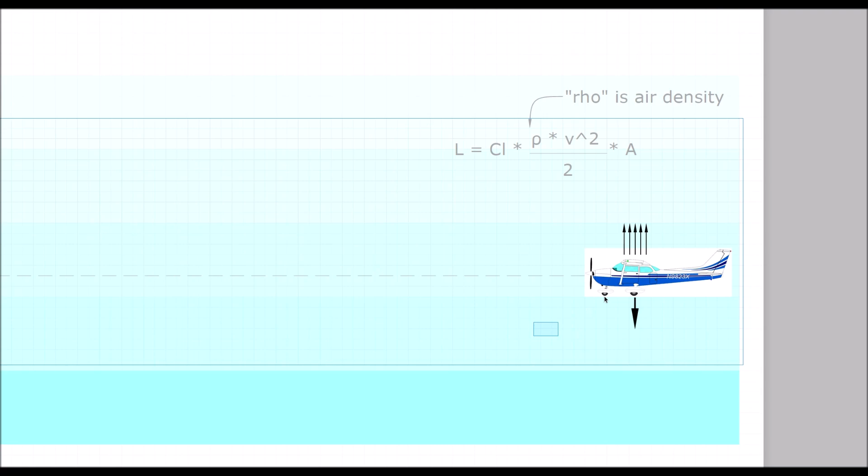So this airplane is flying at a certain speed, and with our velocity, our shape factor, and our area all in place, it is at a level in the atmosphere where the lift force, L, perfectly balances the weight of the airplane, so it does not fall to the ground and it does not rise any higher into the air. That's where the airplane stands right now. And so long as nothing changes, it continues to move forward at the same speed, in the same air density level, and everything is going to stay the same. It's not going to go up, it's not going to go down, it's just going to go straight ahead.

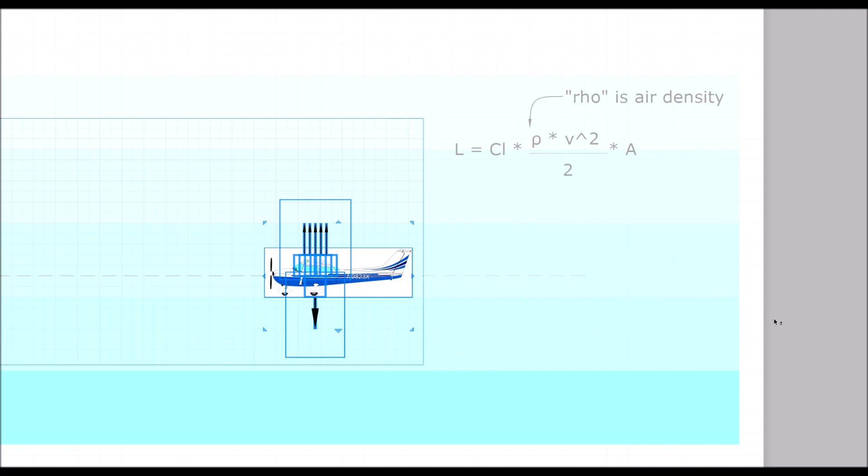Now, the atmosphere does have variations in it. Things happen. Storms, or passing from hot, dry land, like the desert of Peru, and then you find yourself over the ocean. Changes like this at the ground level, storms, can cause the density layers of the atmosphere to change, to shift, to rise up, for example.

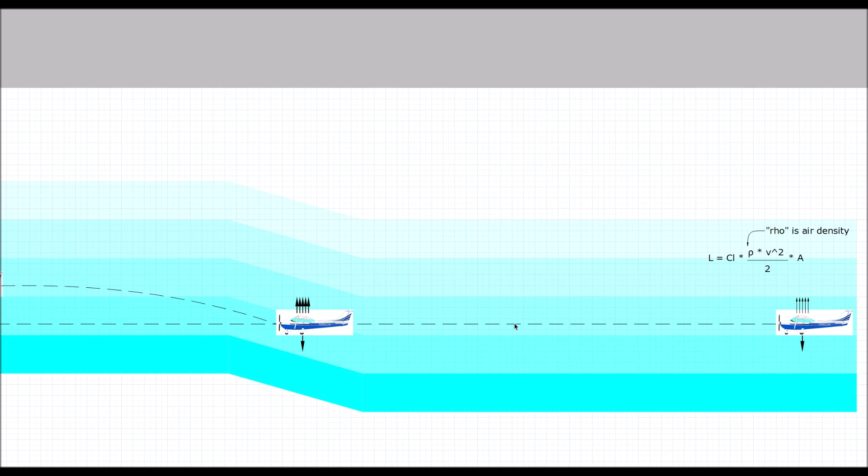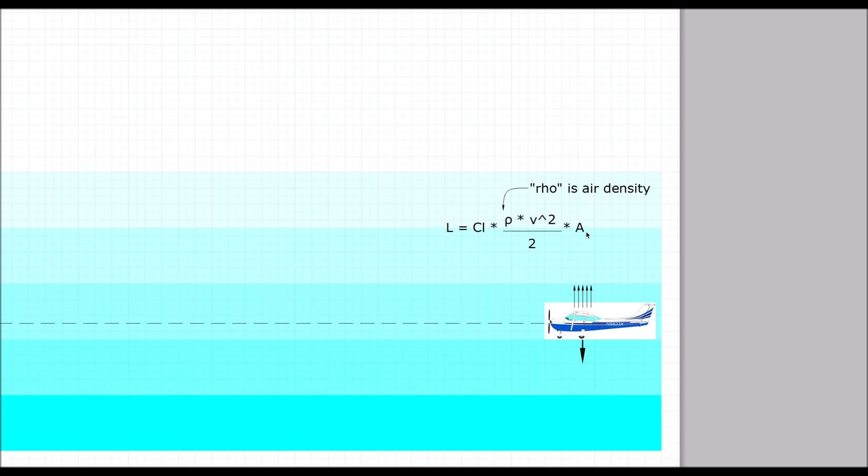So what I've shown here is our airplane. He's moving along in a straight line. Everything's fine and dandy, when all of a sudden there's a quick vertical shift in the density layers, and the airplane suddenly finds itself in a denser layer of air. As soon as that happens, the amount of lift increases because the air density increases. If we go back and look at our equation, if rho gets bigger, lift gets bigger. Shape factor hasn't changed, area hasn't changed, velocity hasn't changed, but rho has gotten bigger. So the lift gets bigger.

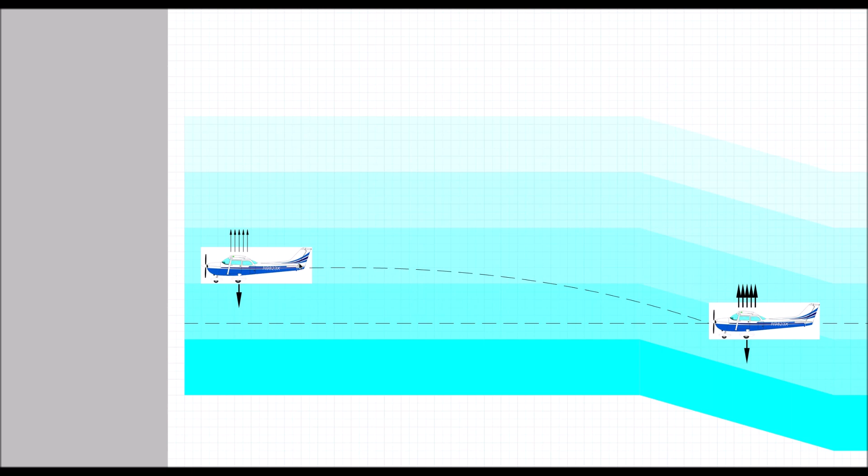Now the lift is more than the weight of the airplane. That means it's being sucked upward away from the Earth due to that denser air. So that plane, instead of going in a straight line, is going to be sucked upward until it reaches a level in the atmosphere where the air is less dense again, like when it first started. And we see that on the left here. It is now at a higher altitude, but in an air density layer that matches the one it was in at the start. Let me go back and give you the big picture here.

So here he was, starting on the right side of the screen, and you can see that he basically ends up at that same density layer at the end. So there was no adjustment that needed to be made by the pilot. Nothing in the shape of the airplane changed.

They didn't tilt the airplane upward to cause it to lift more. They didn't fiddle with the wings to cause it to lift more. It simply went higher because the air density around it changed, which caused the lift force to increase until it again reached an equilibrium point at a higher altitude.

I Can Science That had a moment in his video, in the beginning, where he touched on that, and that was a good way, if T. Brown had been paying attention, of understanding that there's nothing magical involved. So let's take a look. I'm not going to play the clip, but here's a clip. It looks like I'm at 4:50 in I Can Science That's video. He talks about what does unstable mean and what does stable mean.

And in short, unstable, you can perfectly balance a ball on the tip of a pyramid, but the slightest little bit of a breeze or the slightest little bit of a bump is going to cause that ball to fall and roll off the pyramid and be gone. Whereas this arrangement is called stable. You can lift and push that ball in various directions and it will tend to return to its original position.

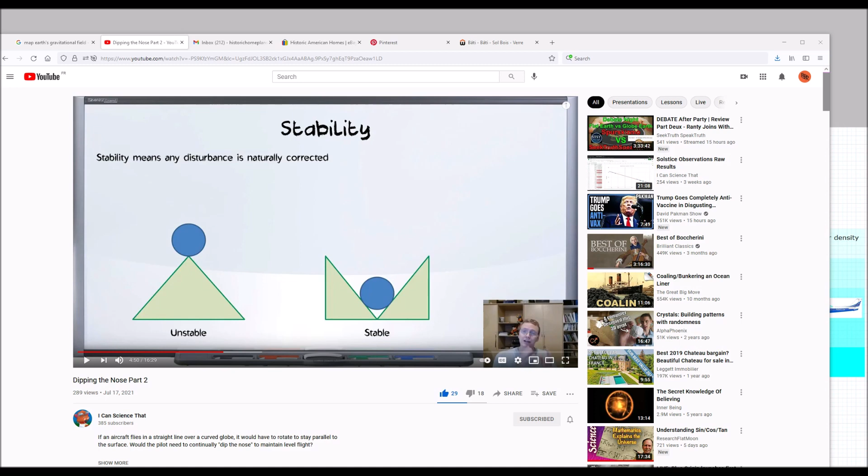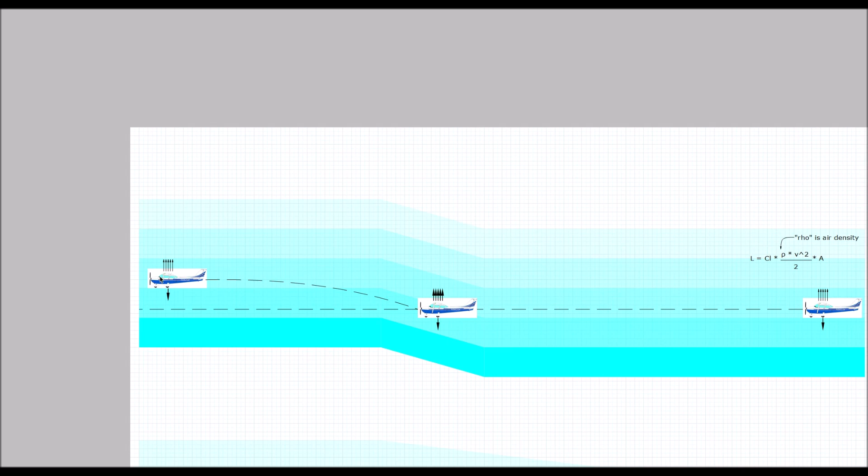This is a factor of design. Somebody creating this arrangement of objects is designing an unstable arrangement. If this is somebody creating a design of objects, they've created a stable design. So this idea of unstable and stable is an aspect of design. Returning to our airplane, the airplane is effectively designed so that it will naturally return, due to the forces acting upon it, to its original or its desired position, the position that is desired by its designer.

Okay, let's look at our next scenario now. It's similar to the first one, with one small change. Instead of there being a sudden disturbance in the atmospheric layers, we have a gradual, more gentle disturbance. Now, the plane, on a trajectory of a straight line, if it were to just continue in a straight line, would find itself in a denser layer.

But what happens is that as it approaches that zone where the atmosphere is changing, the forces acting on it, the lift increasing because of the density of the air increasing, are going to cause it to drift up more gradually to its new position. Basically, it's very similar to the top example, except that it's a gradual transition instead of a sudden transition. I think that should be pretty clear. I don't need to go further with that. So we'll move on to the next scenario.

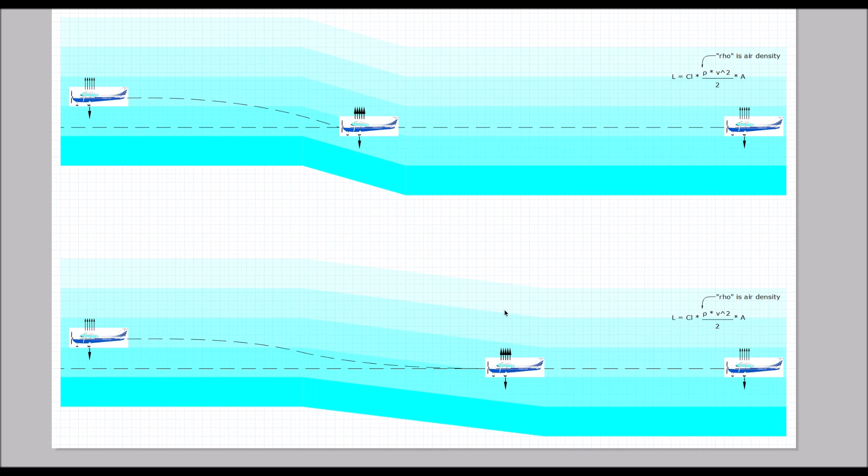So now we're looking at a situation similar to the previous scenario, a gradual transition in the atmosphere. But instead of the density levels going up, the density levels are going down. So the airplane, were it to continue in a straight line, would find itself in a layer of less dense air. Now, same as in the previous scenario, as soon as the change in the atmosphere starts to occur, the lift force is going to get weaker because the air is less dense.

And because the air is less dense, the weight of the plane is going to cause the plane to start dropping in altitude. The lift force simply can't hold the plane up because there's not enough density in the air. And that situation will continue, and that plane will continue to be moving towards an equilibrium point where the lift matches the weight, until such time as that atmospheric layer levels out again, and then it will be back at an equilibrium state.

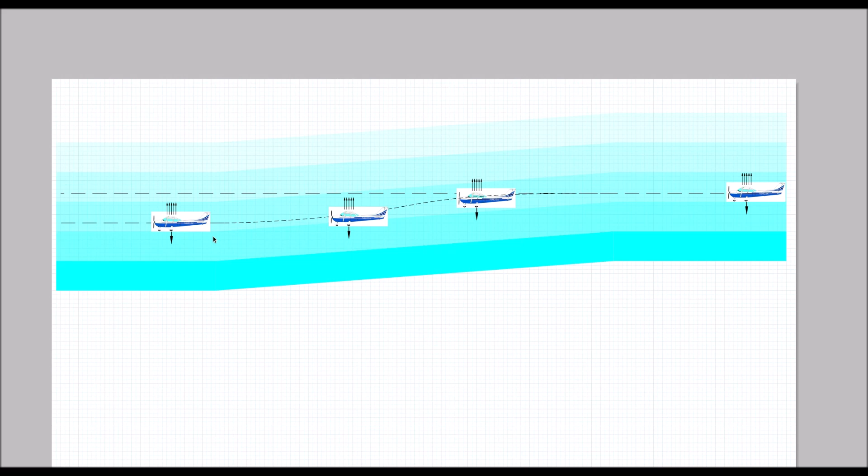So from start to finish, it's flying along here, the air gets less dense, so the plane starts to fall a little bit. And as it falls, it's moving back down into denser air again. And as it moves into denser air, the lift increases until, again, they're finally balanced with each other. So it's really exactly the same situation as we saw in the previous example, except the layers of air are the reverse.

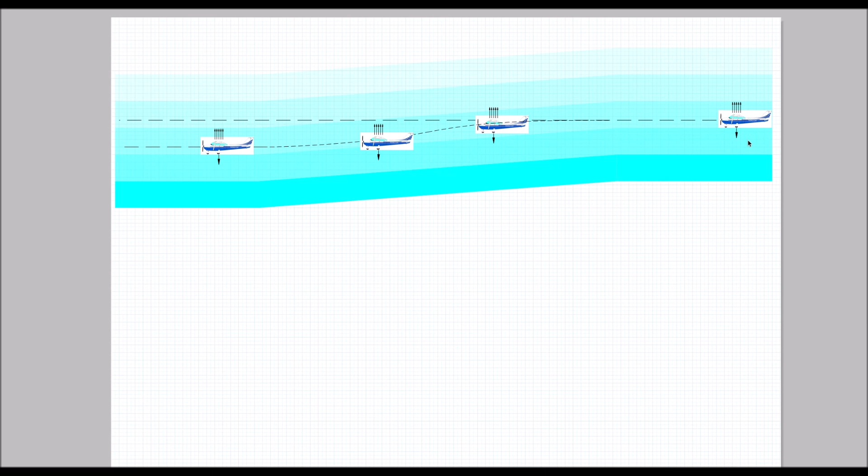Remember, all of this is happening because we are keeping everything else constant. The shape of the airplane is not changing. The speed of the airplane is not changing. The area of the wings isn't changing. None of that's changing. The only thing that's changing is the density of the air. So for this airplane not to fall out of the sky, it has to stay in that same air density layer.

And it really can't fall out of the sky so long as nothing changes, because if it's traveling at a fixed speed in a consistent density layer, the weight and the lift are balanced. It's not falling. It's not going to hit the ground until something changes. If the engine fails and it suddenly slows down, well, then it's going to start to fall. If they rev the engines up and go even faster, then it'll start to rise. But if nothing's changing, it won't fall out of the sky.

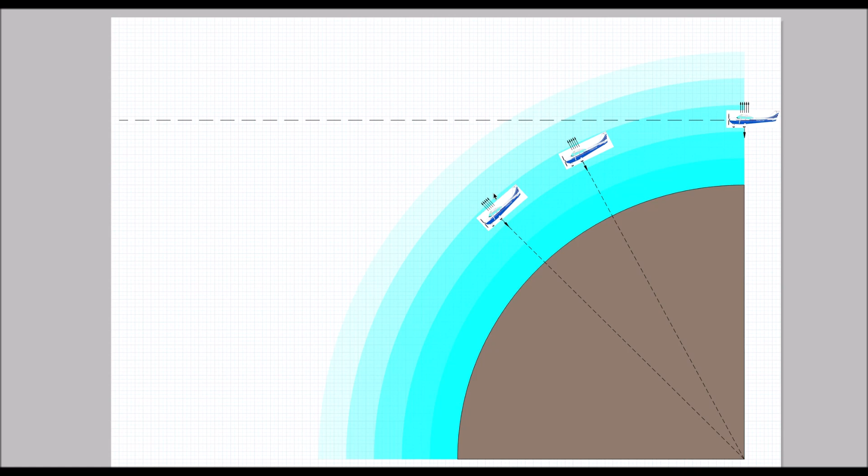Okay, it's time for some definitions. Now, what I'm going to describe here is how I intend to use these words. People can argue all they want about what they think is the correct definition. My point is simply to be understood what I mean. So, nose down, nose up, it says nose high, dipping the nose, level. These are the words we're going to look at.

Nose high, or you might want to say lifting the nose. That same line through the airplane passing through its center of gravity, the nose is above the horizontal, above the perpendicular to the plumb line. During normal level flight, cruising, most planes are designed to fly with their noses slightly up. This is typical. So nose high level flight. That's most of the time what airplanes are doing. And that's what I'm assuming in the diagrams we looked at before.

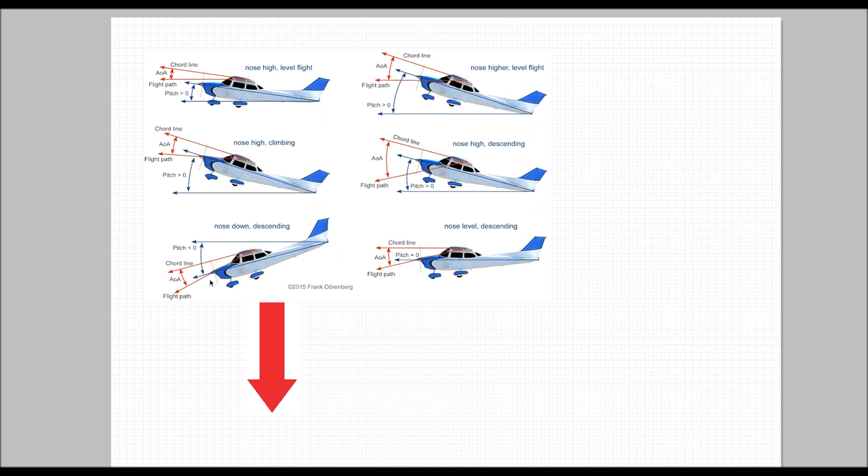I'm not going to fuss about it. If you want to fuss about it, you can. You show me how to do it better if you're going to make a fuss about it. Yes, I'm talking to you, T. Brown. You do it better than this, and I'll pay attention. You do nothing except word salad, and I won't be bothered.

Okay, A, B, C. The plane is in position A. It is flying with its nose very slightly up in level flight as per the upper left diagram here. It has now moved on to position B. It is still flying perpendicular. Here's the plumb line from the center of gravity of the airplane down to the ground, and it's still flying slightly nose up. Nothing has changed.

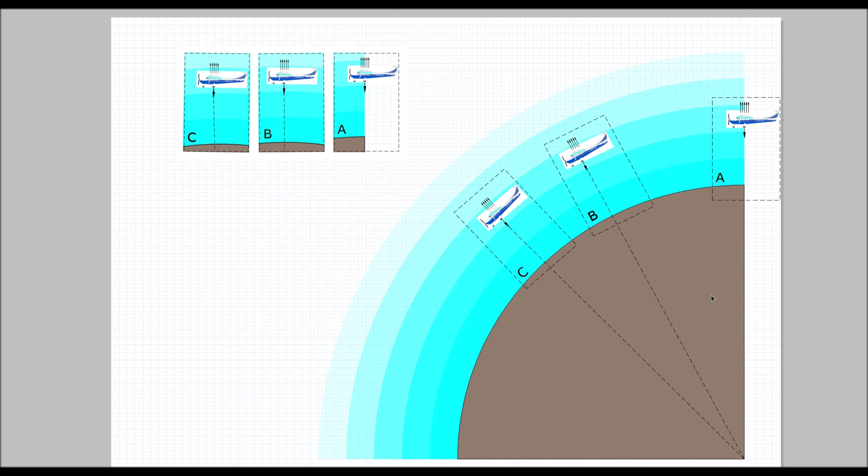Now we go out into space like we are looking at this diagram here, and we are far off the planet. And we're thousands and thousands of miles away looking back at Earth, and there's a plane over the North Pole, and it's gradually heading due south down to the equator. From our position off of the planet, we see this plane flying in a curve. You want to call that nose down? You can call that nose down. When it gets down to here, it's going to be flying upside down. You figure that one out.

But from its position relative to the Earth's surface, which is where we are right now, at least that's where I am, and I expect most of my audience, from its position relative to the surface of the Earth below it, it never changes its pitch.

Now, if you're going to debate that, I think it would be really great to show me some pictures, some diagrams. Who was it? Was it Napoleon who said a picture is worth 1,000 words? I've already probably spoken a couple of thousand words and shown you just a few pictures. You show me some nice pictures that prove that I've got this all screwed up and backwards and wrong. Otherwise, no, planes do not need to, quote, dip their noses, if by that you mean pitch down.

Okay, enough of this. I've beat this dead horse as much as one can beat a dead horse.